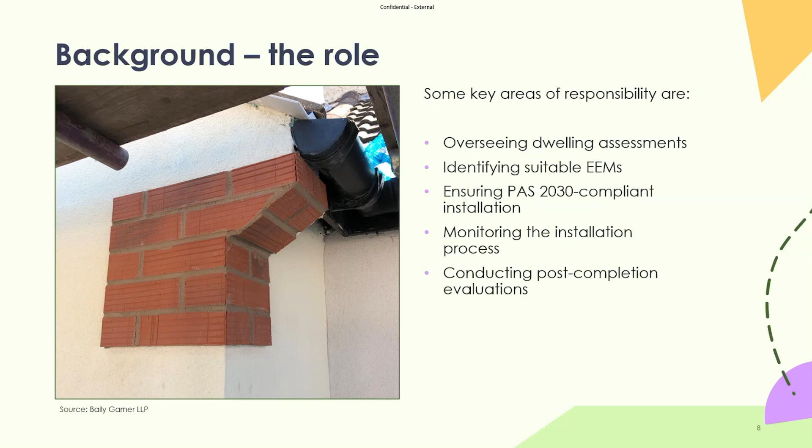So in terms of responsibility then, so employing the coordinator, there is no specific function that employs a coordinator. It's quite a common myth that there is a specific person that needs to employ the coordinator for any given PAS 2035 project. So the coordinator themselves can be employed by a client, a main contractor, like managing a number of installers, a consultancy, an installer themselves, a retrofit assessment company, a designer company, or even an evaluation company.

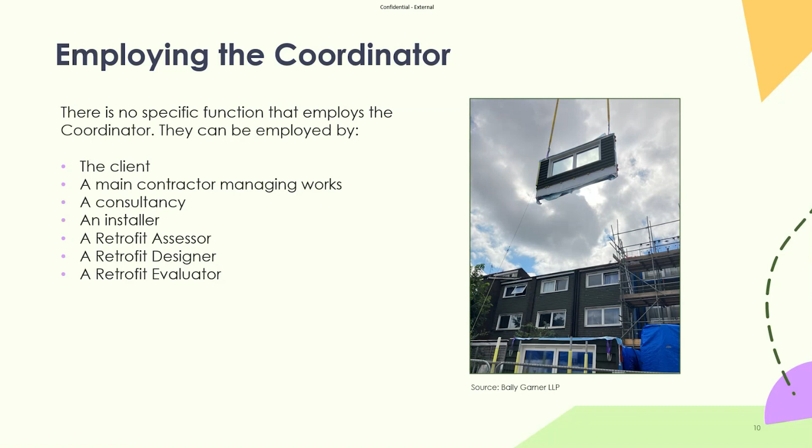We would always recommend that the retrofit coordinator is appointed by a company that is independent of the installation process. So that can be a main contractor that is removed from the actual installation process itself. However, we always thoroughly recommend that there is that level of conflict management in place for employing the retrofit coordinator, given that they do sign off the work as compliant in the end of the project.

So in terms of some top tips with retrofit coordination, you should always involve the retrofit coordinator at the very earliest opportunity, just because clearly if you are undertaking a large project with lots of moving parts, the retrofit coordinator can be your guide not only through the PAS 2035 process, but use their technical knowledge to apply it to the project and ensure that there is a level of quality that succeeds throughout the project itself.

They are technical in their nature, so obviously taking that course that is a retrofit coordination PAS 2035 specific course for level 5 retrofit coordination and risk management, they are able to answer any technical queries with regards to the standard itself that might crop up. So if they're onboarded early, it means that you have that technical ability for queries early on.

They can answer, as I've said, questions on the actual standard itself, and quite often the standard is prescriptive, but every so often it isn't, and there does need to be a judgment call made with some pragmatism around the standard. There is now under PAS 2035:2023 a requirement to get the retrofit coordinator to site to see the installation to every single property. Even if you've got a 1,000, 4,000 property scheme, the retrofit coordinator needs to visit every single one of those properties.

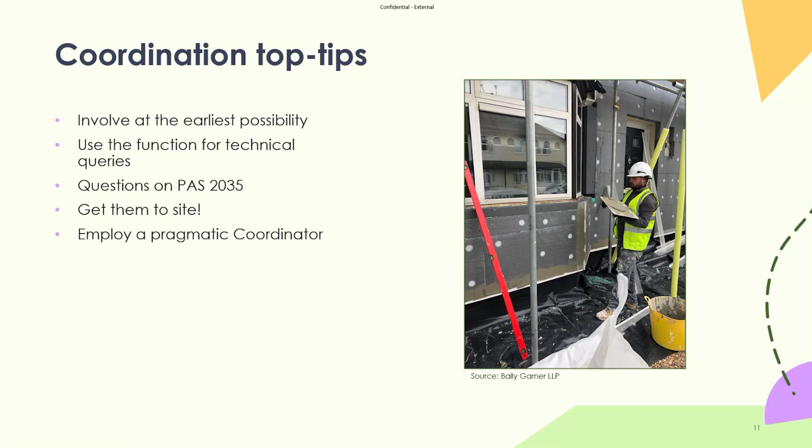So what a retrofit coordinator is and is not. Although they are not a project manager, there are project management aspects to the role. So they do oversee a number of other roles and bring them together and ensure that there is adequate handover from role to role. Examples being the retrofit assessment to the design stage and the design stage to the installation stage. They act as a technical expert, but should also be aware of time, budget, risk and resource.

So although they're not necessarily responsible for those kind of very QS and project managery functions, they should be aware of them, and that is a requisite of the standard. They work to compliances and must adhere in an independent right. So they work for the standard, they don't work specifically for one party.

So they have a claim of compliance at the end of the project, which means that they effectively certify the project as retrofit PAS 2035 compliant. So they aren't working for one particular party against another. They are working solely there for the standard.

They do not define the strategy for the project. So they can't come in, unless they have a specific skill set outside of the standard and their qualification, and effectively determine your strategy as an organisation for retrofit. So if you're a large housing organisation, for example, the retrofit coordinator isn't going to sit there, identify all the properties on your portfolio and identify your strategy. That's not necessarily their role, and they do not manage the contract.

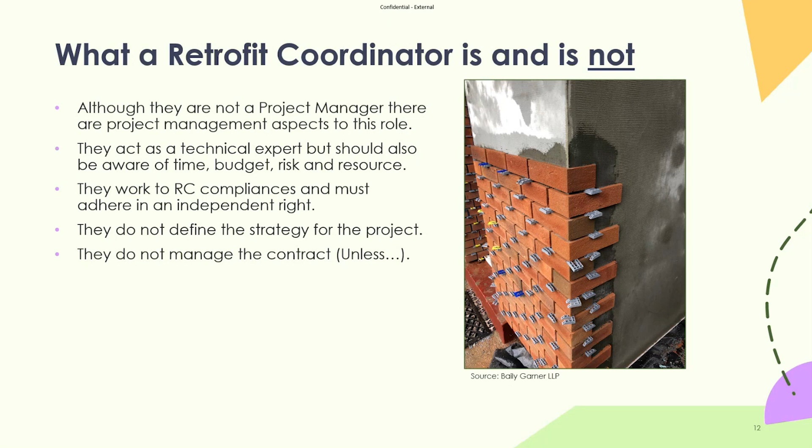So just a bit of a summary of the responsibilities here. So coordinators oversee the PAS 2035 requirements, whereas a project manager develops a retrofit scheme and delivery approach. The coordinator analyses the assessment and development of suitable energy efficiency measures, whereas the project manager would create a project execution plan. So that project execution plan is wide-reaching, whereas determining specific measures for a property clearly isn't as wide-reaching.

Overseeing energy modelling and developing the medium-term plan, so what the future of that property is post-retrofit, whereas development and management of a project program would be the project manager's responsibility, not necessarily a coordinator's job to develop programs and kind of stepping into that construction project manager's role.

Ensuring other functions receive the required PAS 2035 information. That's what I was talking about in terms of handing off those various gateways of the PAS 2035 process. So it kind of goes from coordinator to assessor to designer to installer, back to evaluator and coordinator again. Management of the construction contract is more of a project management role, as is managing overarching risk and managing the actual financials of the project, often through a QS.

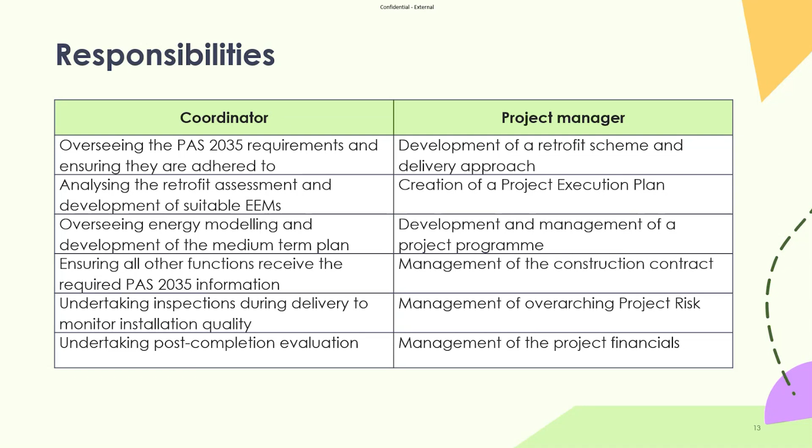And then the responsibilities of the coordinators will be undertaking inspections during delivery to monitor installation quality, not necessarily a full clerk of works role, but they'll certainly be having a look at the quality of installation for the PAS 2035 works, and then undertaking the post-completion evaluation as well, as we've discussed.

So the coordinator's role in quality assurance, and this is a subject that's quite close to my heart following visiting quite a few properties over the course of the last 2 years to have a look at why retrofit has failed in those properties. So PAS 2035 embeds quality as a non-negotiable principle, ensuring that retrofit projects are effective, safe and sustainable. But quality assurance itself isn't just about inspection. It is about prevention in early stages as much as about assessment and inspection.

And kind of going back to your point that you've raised in the chat there, Stephen, it's great to have site presence because it means that you can sort out issues before they get to a crescendo. But actually, if they're involved early on in the project and you've got somebody that really values quality highly, you would hope that it never actually gets to that point, albeit you can only make so much allowance for human error.

So a high percentage of poorly executed projects, specifically that I've visited, and I don't know about you guys if you ever undertake any visits to completed properties, they have been issues that could have been completely avoided if PAS 2035 principles had been followed. And as I say, it says a high percentage there.

Looking back on my experience, I would probably say all of these. If you followed PAS 2035 to the letter and did everything that you're supposed to under it, the risk basis that PAS exists in means that you would have probably avoided the unintended consequence of a lot of the failures that I've seen.

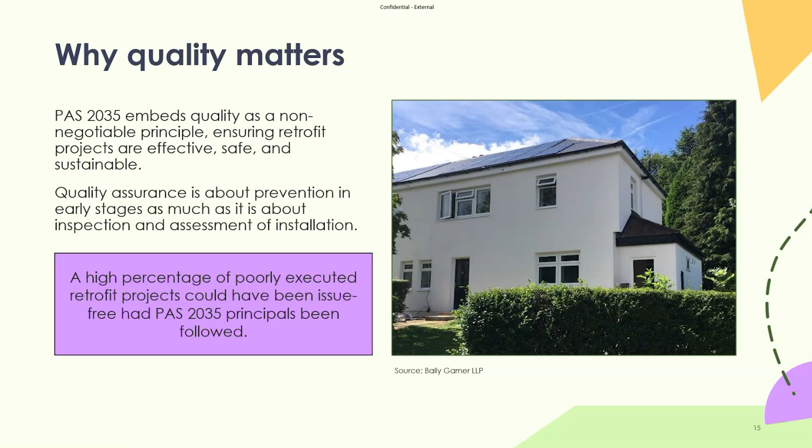So one of the key reasons for quality in the standard is occupant health and comfort. Obviously, over the course of the last year or two, you would have heard a lot about Awaab's law coming into effect. There is a massive read across between damp and mould and quality in retrofit, as I'm sure many of you would have seen in various articles that have reached the news recently.

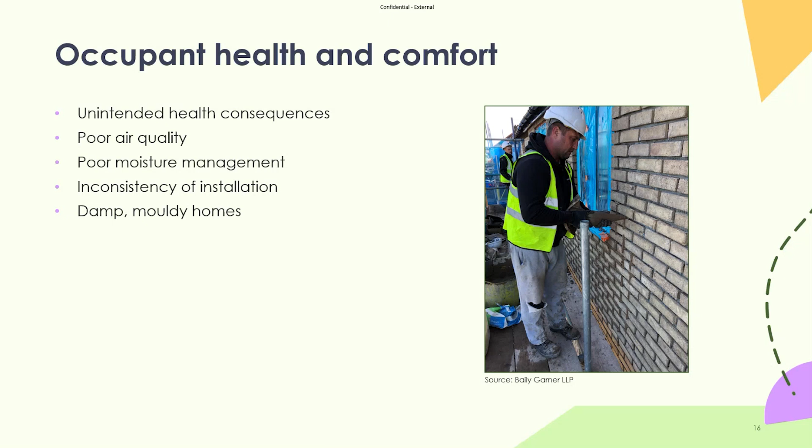So these are unintended health consequences: poor air quality, poor moisture management, inconsistency of installation, damp, mouldy homes. All of these can be a result of poorly managed quality, cutting corners, if you like, on a PAS 2035 project. So as a case study, I visited a property last year.

It was a routine completion inspection for another retrofit coordinator. No context of any issues when I arrived. All I knew was that there had been an air source heat pump and some solar PV installed as part of the installation. The air source heat pump replaced a trusty old oil boiler, and the bills had increased from £1,600 a year to £5,000 a year. So in context, that's 500 quid a month they were paying to heat their home, which is extraordinary if you think about it.

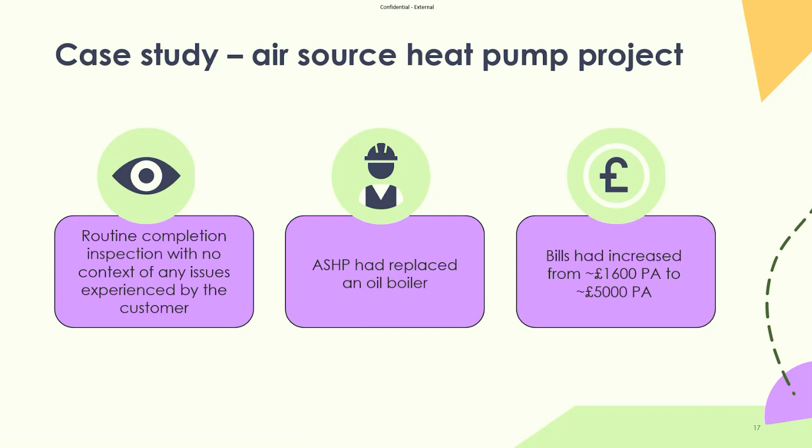So just as a bit of interaction, in the chat, how do you feel a retrofit coordinator could have influenced that? What do you think some of the issues could have been for that level of failure in an installation? So Stephen said that the property clearly wasn't heat pump ready, lack of insulation, terribly insulated. Seeing a lot of insulation here. Overview of design. We'll come on to that, John.

Monitoring was lacking. Great point, Mark. So there was an oversized system. So yeah, we've got some really good ones here. Wrong size pump, insufficient fabric measures and ventilation measures. So all of these are really relevant. Actually, the property was very well insulated.

It was a cavity wall property that was quite recent in its construction, so mid-90s. So it had a fairly sizable cavity, which lent itself to cavity wall insulation. No damp spots or any indication that the cavity insulation had failed. A cavity borescope survey showed that the cavity wall insulation was consistent. There was a room in roof, but the room in roof was incredibly well insulated.

So we had very well performing double glazed windows. So in terms of that tea cosy of an envelope, we were doing very well in terms of the physicality of that fabric. So I had an inspection of the system and found out that the first point of failure was the system design, as John mentioned there.

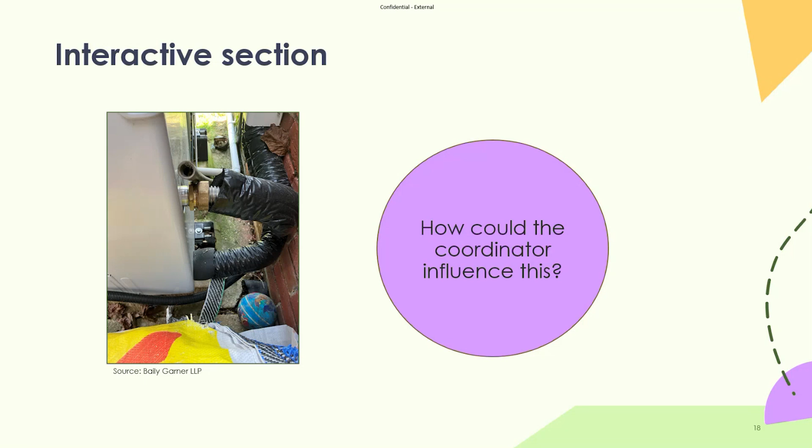Really interesting for me, and I say that quite loosely, it's interesting, but it really affected somebody's life. So somebody's life has got markedly worse because of a lack of quality, effectively, and a lack of oversight that a standard is in place to provide. So just got some of the outcomes here.

So a coordinator acting in the interest of the customer would have ensured the modelling for the air source heat pump determined it was a worthwhile improvement, which met the intended outcomes of the project. The coordinator would have had the technical understanding of the system, a basic grasp of operational temperatures and how the air source heat pump works. And I know that somebody's mentioned operational temperatures in the chat there as well. And an understanding of the system would have been shared with the end user.

None of this happened. So somebody just turned up, did everything and went because they wanted to get to the next job. And actually PAS 2035 was seen as an inconvenience rather than something that was there for quality and protection for the end user.

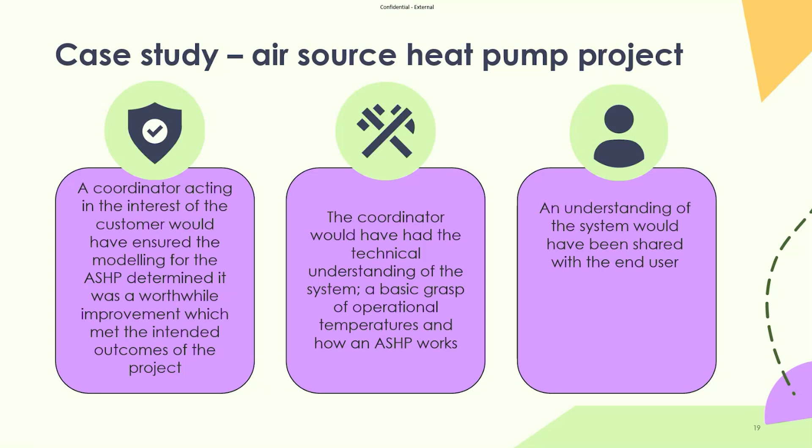So just another interactive part of the session then. Just as a group, what do you feel this does for confidence in the sector? And this is a really pertinent time to ask this question, because the last time I did this, we had that report from the BBC where we had some failed cavity wall insulation, and now we've had the NAO report from the ECO project. I'd like you to think about what you think this does for confidence in the sector.

Yeah, I mean, Alex is pretty graphic there, drops it into the toilet, but it really does, doesn't it? I mean, if you're a resident of, say, a housing association that's part of an SHDF project, and you have somebody calling you saying, we want to insulate your home, you're going to run a mile. You're not going to be interested because of effectively what has been a very cavalier approach to applying the standard previously that could have been avoided.

And Mark's kind of hit the nail on the head there as well. Where were the RCs? Where was the quality oversight? And don't get me wrong, this opens a can of worms into something that's so much more than just a bit of oversight. It's effectively ECO creating a race to the bottom, if you like, in terms of what funding is available for ECO and how big the profit margin you can actually make on any ECO funding is, meaning that it's relatively difficult for installers to make a profit on any work that they do. But even still, this should have been seen ages ago. It should have been seen coming.

And actually, it feeds into that bigger picture of trust in the industry, doesn't it? And how much that depletes trust, like anything. And that would be applicable to local authorities in the wake of Grenfell as well. There's a myriad of other examples of how bad publicity and one or a couple of bad eggs can really affect the whole industry. So quality is really, really important in retrofit coordination and PAS 2035 generally.

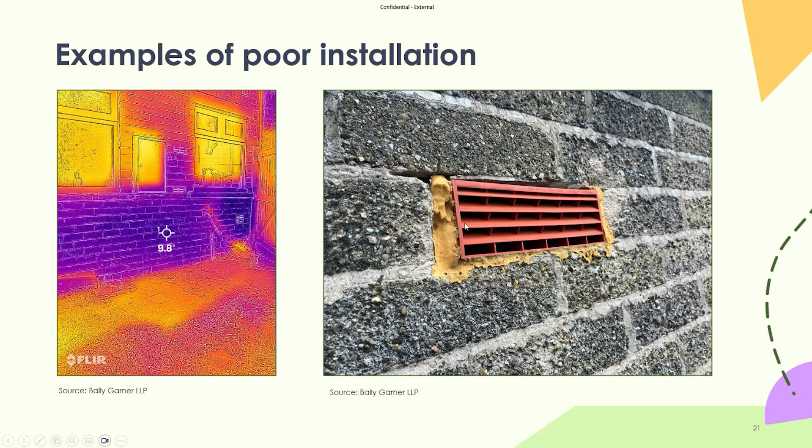So this is a cavity wall property that was cavity filled. This is a sleeved air brick, so that goes all the way into the property itself through the cavity. And somebody has decided to fill it with expanding foam, which is prohibited under the installation of any insulation under the standard.

Yep, good point there, Stephen. Should have fitted some aerogel or even a thinner profile EWI. I agree, it would be a failure. Unless, of course, you could demonstrate that it wasn't a thermal bridge risk through an FRSI or similar. But yeah, there's nothing stopping you just trying to break that thermal bridge by putting a thinner piece of insulation down there or similar.

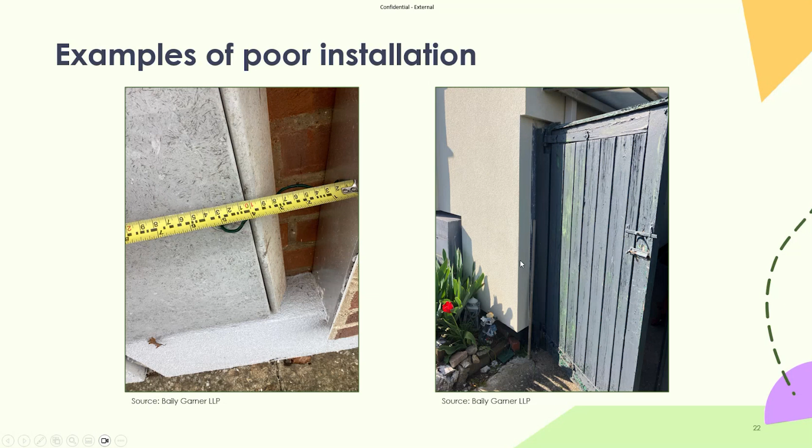Yeah, I would agree the gate post is a bit of a bang to rights job, that one. So again, this property was an EWI property, no ventilation installed adequately in this one. You can see you've got a bathroom here without any bathroom fan in it. The cause of this was actually some water getting down the side of the insulation itself.

So the join at the top of the property had a non-compliant cowl at the top joining the roof line to the EWI and had failed, was only being held together by some mastic. So of course that just created what was effectively a sheath for water to pour into, and then the water had to go somewhere. Invariably, it went inside the property.

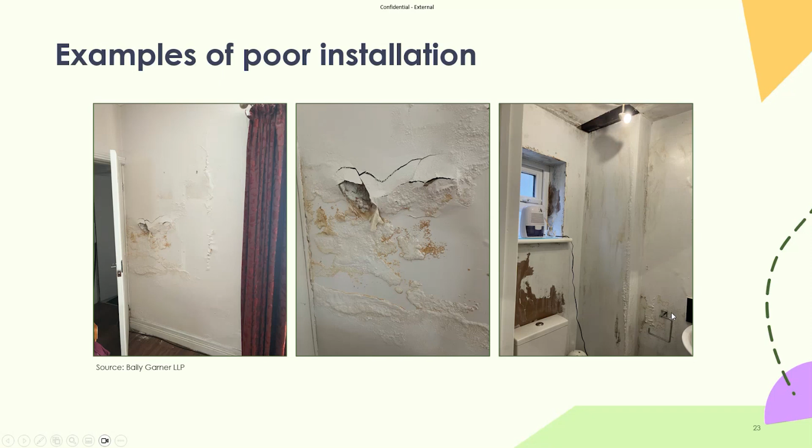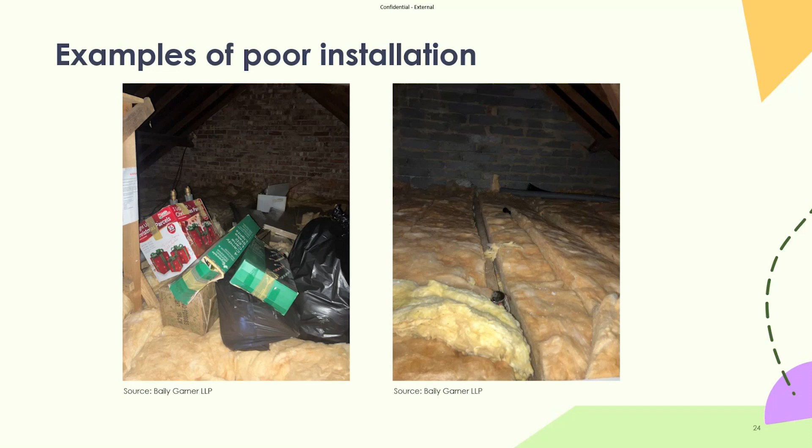So this one is an insulated roof where somebody has stored all of their Christmas decorations up there, which I know that I certainly do. And that compresses the insulation and renders it a lot less useful than it is modelled to be. Then on the right hand side, somebody has installed some insulation, but hasn't crossed the insulation over the joists. So you've effectively got a cold bridge there created by the joists in the loft space.

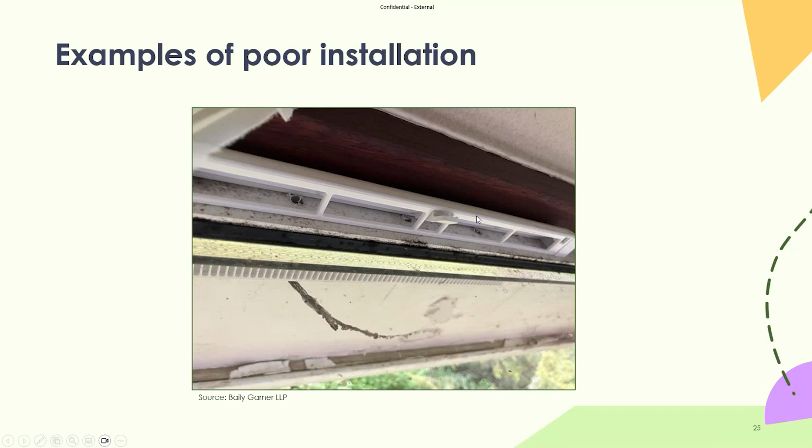And then this one is one of my personal favourites. Somebody was due to install some background ventilation through means of trickle vents in windows, and decided to just slap a trickle vent on there and put a couple of drill holes in there. So it doesn't quite meet Approved Document Part F requirements for background ventilation, that one, I'd imagine. So clearly called the installer back to that one. Wasn't a very good installation. So in terms of energy efficiency, savings and durability there.

So I think, in my opinion, quality closes that gap between expectation and reality. So if you have no quality management mechanism through a retrofit coordinator or on other projects like a clerk of works, etc., making sure that everything's being installed the way it should be, making sure that you don't get some of these home builders that cut corners and leave people purchasing houses with lots of issues to solve, that expectation becomes a reality if you don't have that in place, and that slowly diminishing set of circumstances arises where it gets worse and worse, just where you've got no oversight.

Nobody's got a hoop around the neck of whoever's doing the install to make sure that they are following what they have to. You will invariably start to have that reality fade away from what the expectations are.

So another output of that is lower energy bills, or at the very least lower energy consumption, because obviously if you're going from a gas source to an electric source, bills can increase slightly or remain stagnant because of the cost of electricity versus gas, but it is all about that energy consumption and lowering it. Puts us closer to achieving those decarbonisation goals. So if a property requires less heat to warm it up, you're burning less, so you're getting closer to decarbonisation.

Quality means that long-lasting product. I mean, you can all imagine a brick wall that was put together in the Victorian era and that's still standing today. It's because of the quality with which it was put together, because you'd imagine that if it didn't have the quality, it wouldn't still be standing.

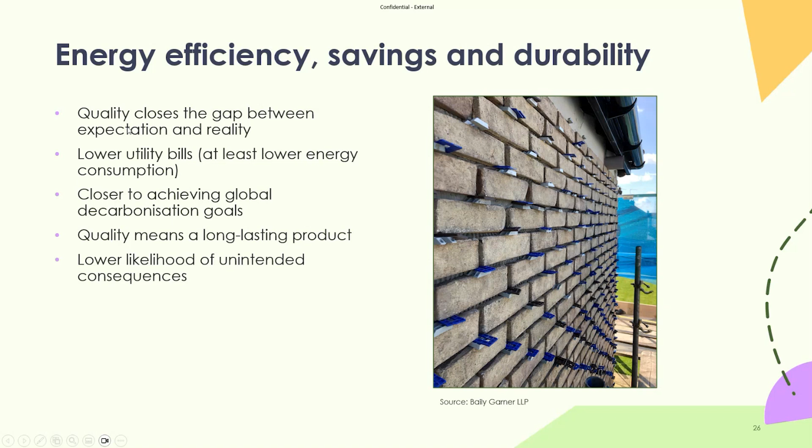So in terms of funding and alignment, any retrofit project that's government funded needs to be PAS 2035 compliant. So anything GBIS, anything ECO, anything Warm Homes, anything SHF or SHDF, needs to be PAS 2035 compliant for residential retrofit, that is. The standard provides that benchmark of quality assurance for the funding. So the reason government want it to be PAS 2035 compliant is because the document is recognised as being adequate to provide that quality at the end of the process.

And the beauty of it is that the quality behind the standard is consistent regardless of the project. It can apply to a simple loft top up, it can apply to a whole house retrofit. The standard itself will ensure that the quality is there if followed properly. And look, compliance is challenging. We all hear these beleaguered colleagues that talk about how difficult it is to jump through the hoops of PAS 2035. But effectively, it is a QMS.

It is a quality management system. And all contractors have a quality management system. This just unifies that system and makes it the same for absolutely everybody. And that's the way I put this when I'm talking to clients about PAS 2035 and if it's worth having it in place. It's always worth having it in place because it is a QMS. In its rawest form, it manages quality.